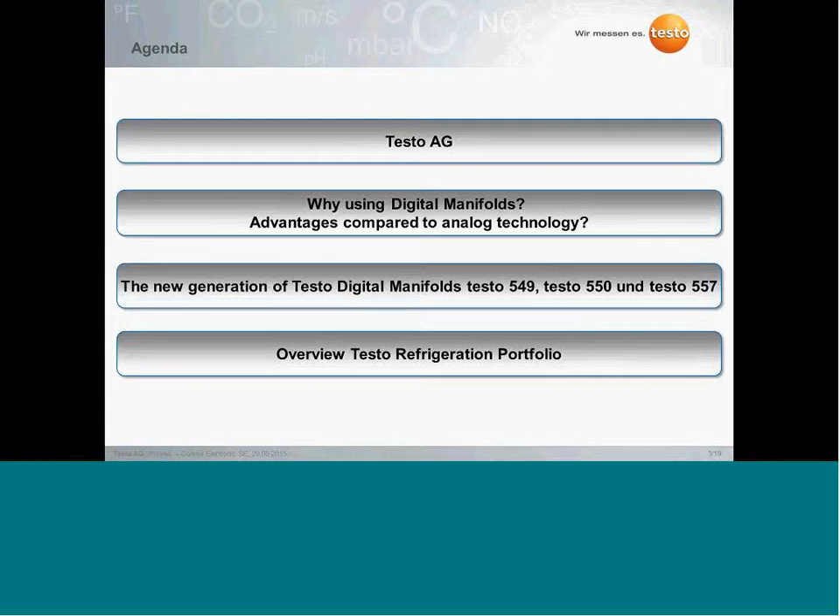Directly, who are we? The Testo AG was founded in 1957 and is located in the Black Forest region of Germany. It is a leading manufacturer of portable and stationary measuring instruments, with around 2,500 employees worldwide. It offers a great variety of products and has clients and customers in different industries.

So here you see an overview of the 4 product groups of Testo, beginning on the left with the product group HVACR, which includes all the products used by heating contractors, for example, or also refrigeration contractors. You see we have the flue gas products, air conditioning measuring instruments, and also the refrigeration products. Then, secondly, we have measurement data monitoring systems. Here we have especially one product, the Testo Saveris, where you can measure and monitor temperature, humidity and other measuring values.

Another product group is food and drugs, where you can find all the products used in the food and drug industry to, for example, monitor food production processes. The 4th product group is thermography and emission, where you can find thermal imagers, which are used by contractors but also by energy auditors, and emission products to measure emission in the industry. Finally, a 5th, not a product group, but offered by Testo, are services, like for example calibration of all of our measuring instruments.

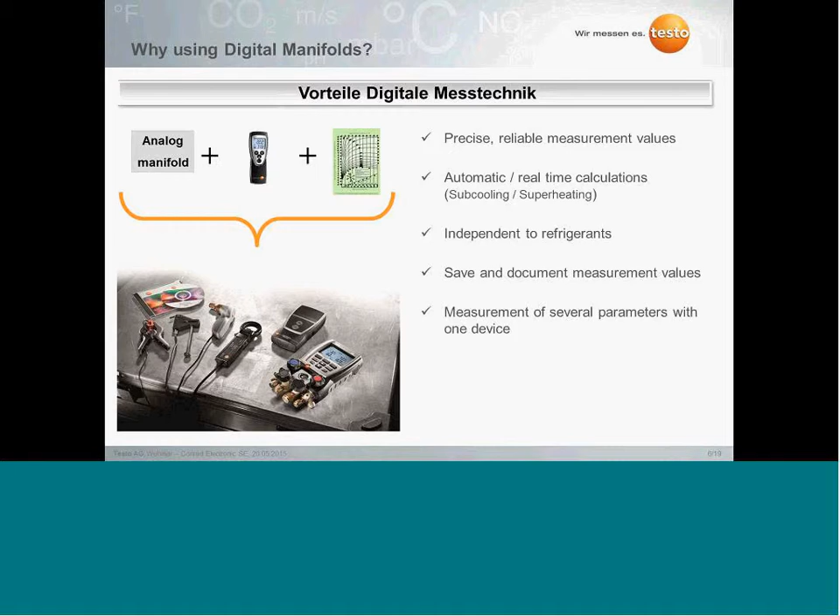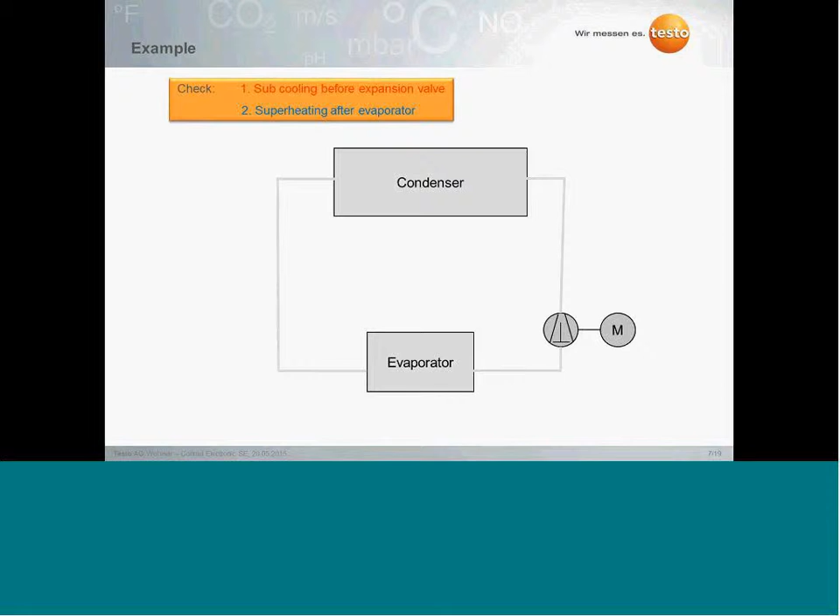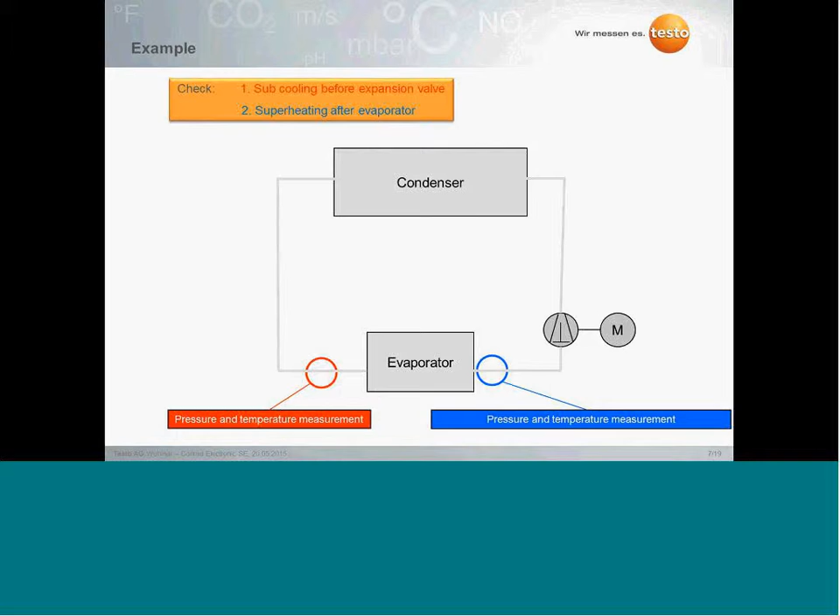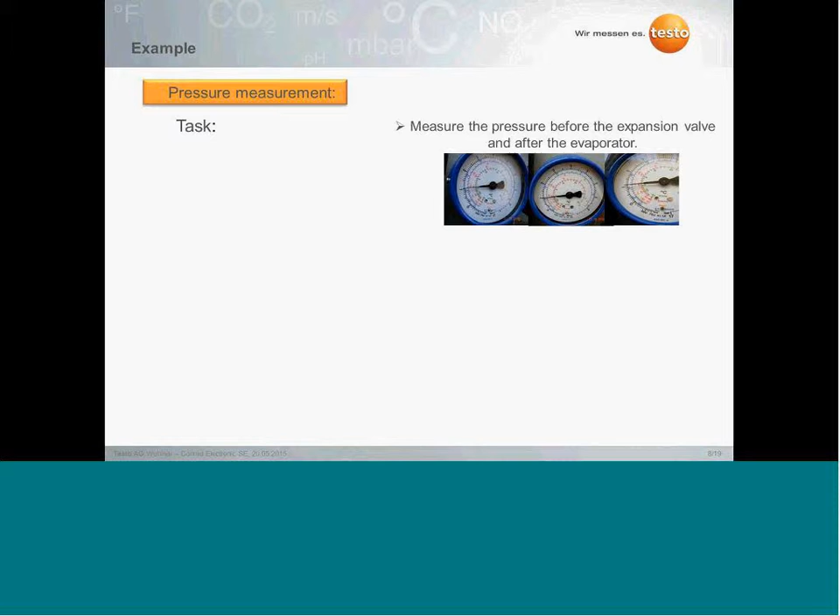First measurement, we have to measure the pressure before the expansion valve and after the evaporator. What are possible failures in this process? The first one: the measuring point of pressure is sometimes not the point where we want to exactly determine the pressure. That means we cannot just determine the pressure in any place of the system. We have to check that we have a connection on the system and can check the pressure. The second thing, which is not a very big failure point but still has to be considered, is we can have a pressure drop in hoses, valves, and the valve block of the measuring instruments.

A major point is how accurate our manifold is, and the impact of ambient pressure. Depending on the ambient pressure, whether we are at sea level or in the mountains, our values can change. Then on the analog manifolds, we have a high risk of parallax error. You can see this very well in the pictures above. Depending on which angle you view the gauge from, you will see different measured values, which is also a risk of failure. And of course, we can make mathematical mistakes.

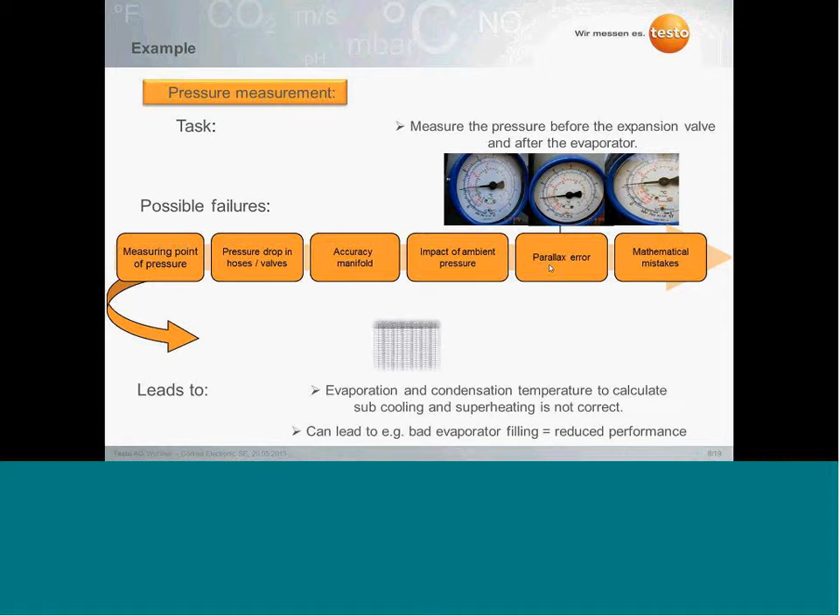We can, for example, check the pressure of the system and not correctly calculate the condensation or evaporation temperature of a refrigerant. These failures can occur, and this of course leads to wrong evaporation and condensation temperatures, which are also the basis to calculate subcooling and superheating.

To come to our subcooling and superheating, of course, we have to measure the temperature of the refrigerant. Possible failures: firstly, the measuring point. Do we measure the temperature at the point where we really want to know it? And secondly, there's always a temperature difference between the pipe, which we are actually measuring, and the refrigerant inside. And depending on the outside temperature, we have an impact of the ambient temperature on the measurement. Because every time you measure temperature, you only measure the temperature of a sensor element.

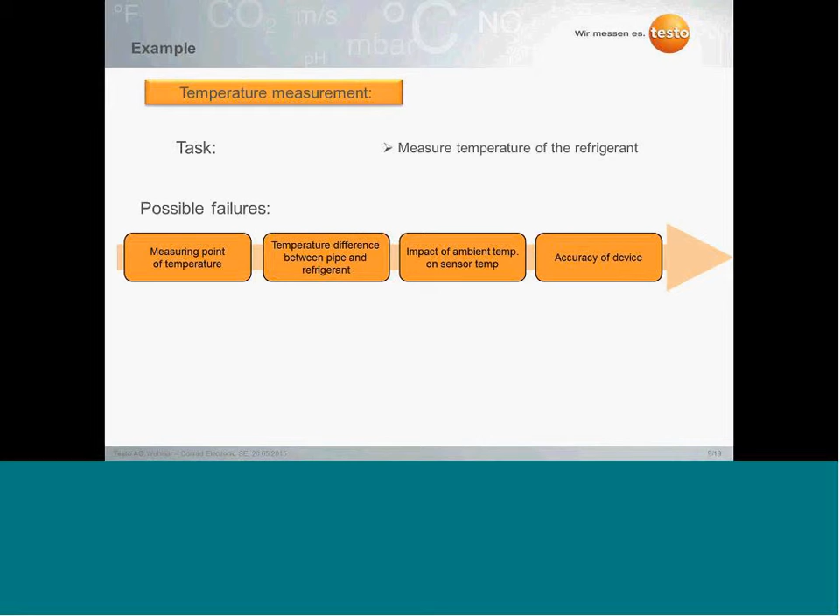Also, we have differences in the accuracy of the measuring devices. This again leads to wrongly determined absolute temperatures, and then to calculated superheating and subcooling values. This will have an impact on how the system is set up, of course.

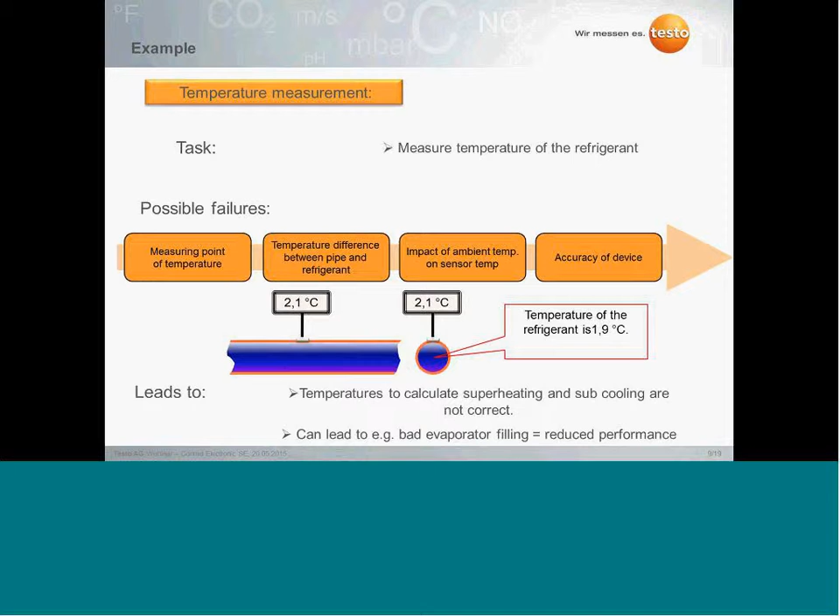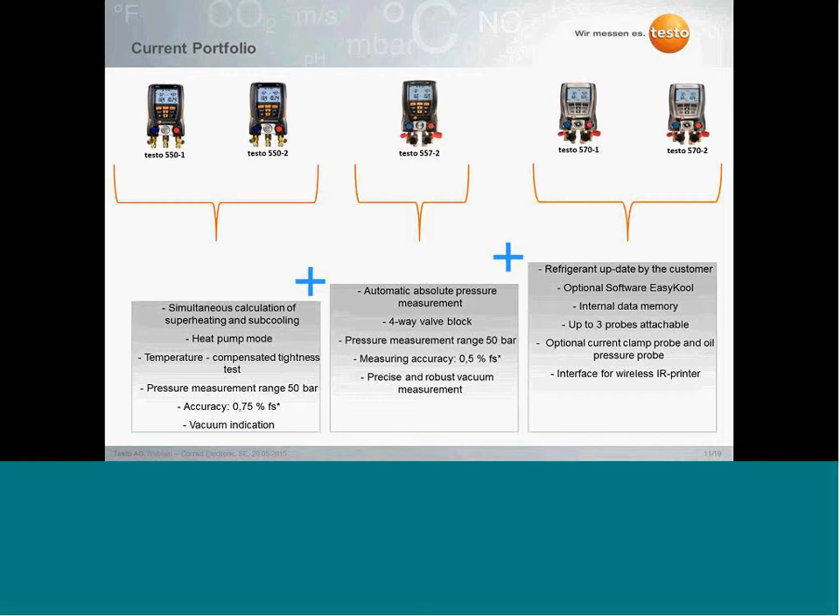Some of you may already have or use Testo manifolds. In the current portfolio, we have on the left side the Testo 550 with a two-way valve block, the Testo 557 with a four-way valve block, and the 570 also with a four-way valve block and with the ability to save data and use PC software. So this is the current portfolio. What will change? We did a relaunch of the 550 and 557 models. The 570 is at the moment not being relaunched, but will still be available for you to buy.

Let's come to what we changed. On this slide we summed up quite some little things which are quite important for everyday work, we think. We made the instrument more robust. These are used as a tool, we know this, so we tried to make this product more robust and reliable for your everyday work, for example by putting in additional frames to protect the display, or IP42 for all the devices.

Then we tried to improve the handling of the instruments. For example, we put in a better four-way valve block, which can be handled better. Or, for example, we now have automatic temperature sensor recognition. Those of you who currently use Testo digital manifolds will know that if you plug in a temperature probe, you need to turn on the instrument again to start working. This is very annoying in everyday work. So with the new instruments, probes are automatically recognized even if they are plugged in during operation.

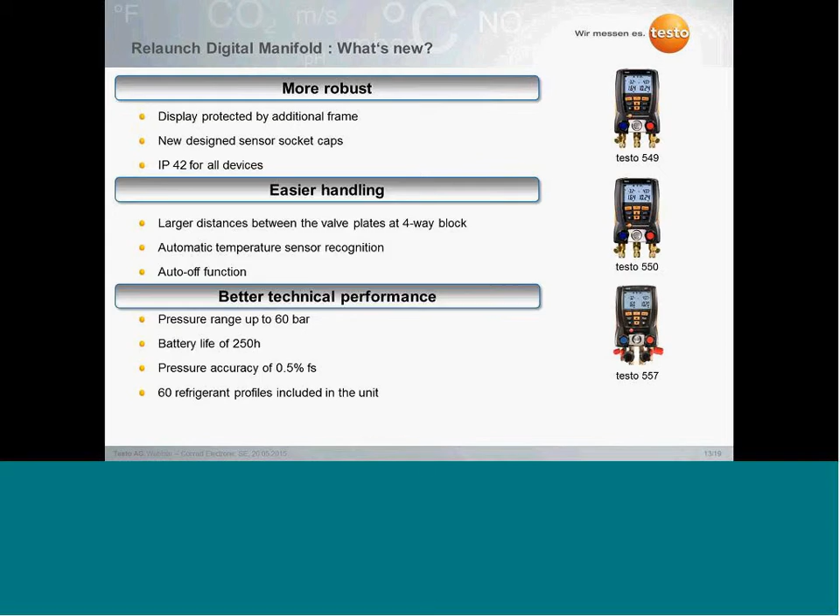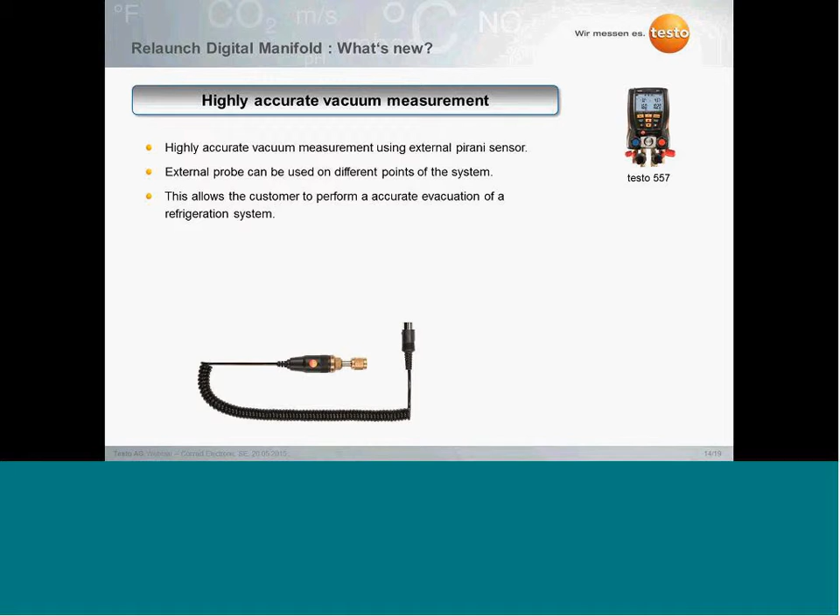The new product range includes a hybrid vacuum probe, an external probe based on a Pirani sensor. The external probe has the advantage that it can be used on different points on the system, depending on which connections a system offers to you. You can connect it on different points, and of course, accurate determination of the pressure is important to a good evacuation on your refrigeration system.

One point of our relaunch is the Bluetooth and app functionality. This is offered by our Testo 550 and Testo 557. Both instruments come with Bluetooth included. We have an app called Refrigeration. You can download it from the Google Play Store for Android devices and for Apple devices from the normal App Store, and can use this for free with the instruments.

For Android, this can be used with versions starting from 4.3, and iOS starting from version 7. The range of this Bluetooth wireless connectivity is about 20 meters in free field. So this gives you the possibility to work with your instrument, for example, at a system and walk around the system. You don't have to stand in front of the instrument all the time if you are, for example, doing changes on the system and checking how these changes influence your measured data.

This means you show data as digits or as graphs when doing adjustments. We also have the possibility to send out data as CSV, that means Excel file, and PDF file, for example, to the office or to a customer.

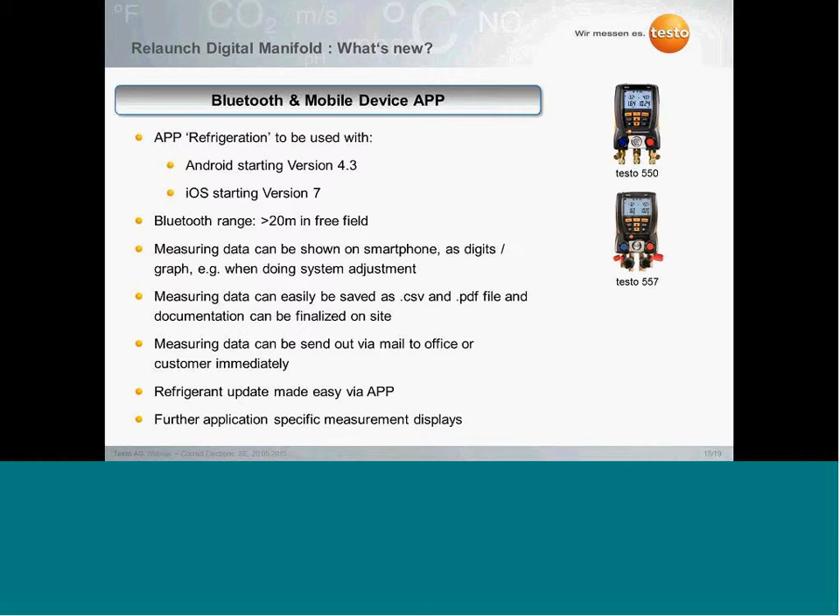Of course, in the future, because the world of refrigerants is changing constantly due to emissions, we will update these refrigerant files on your smartphone like an app is normally updated, and you will be able to put the data on your manifold. Just to give you a brief overview, we have some of the screens here.

On the left side you see the standard pressure and temperature screen where you see all your measured data in digits. Of course, you can also change here from PSI to bar, or from degrees Celsius to degrees Fahrenheit if you need it. In the middle you see the trending view. You can choose up to 4 different values and trend them, and also check how your values develop over time when you're checking your system or doing work on your system.

On the right side you see the report where you can put in an address, pictures, and also your measured data, and send this to your inbox for documentation or, for example, to a customer.

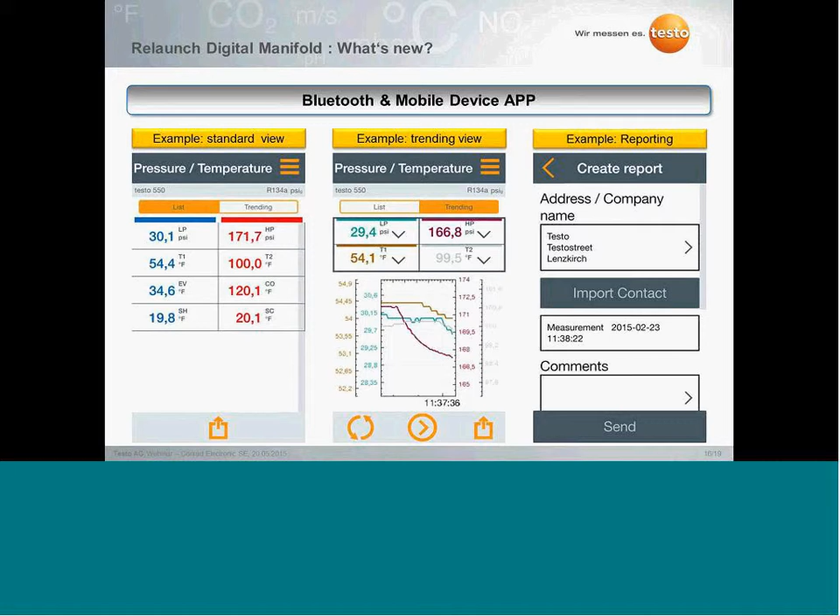To sum this up: on the upper part you see the existing, actual manifolds, and below you see the new relaunched manifolds and what they include. Starting on the left side with the 549, the set includes only a device and batteries. In the middle you see the Testo 550, which includes the device, 2 clamp probes to measure temperature, and of course the app and the Bluetooth functionality.

And on the right side you see the 557, which also includes the temperature probes, the case, the app, and in addition the set includes an extra vacuum probe to make a safe evacuation on your system.

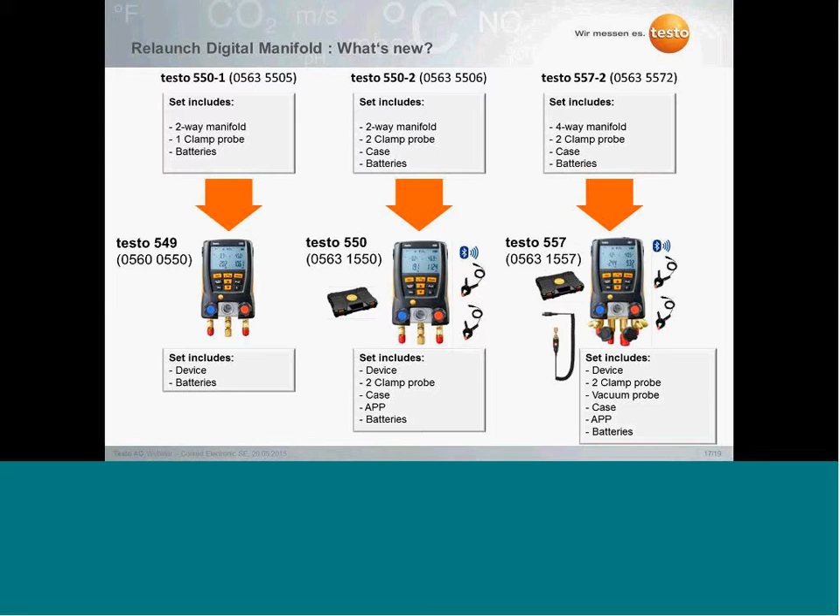Looking at the new products in the full product range, you see the products we just talked about on the left side, and still the two models of Testo 570 on the right. The Testo 570 is a four-way valve block manifold which does not offer Bluetooth technology, but offers an internal storage, which is a great advantage when monitoring systems over a longer period, for example, 1 week or 1.5 weeks.

This data can afterwards be checked, analyzed, and of course documented by using the so-called EasyKool, which is PC-based software which can be used with the instruments. Okay, that's all about our new manifolds.